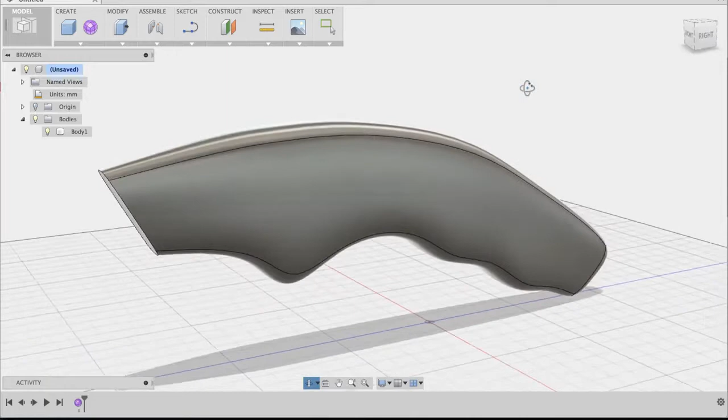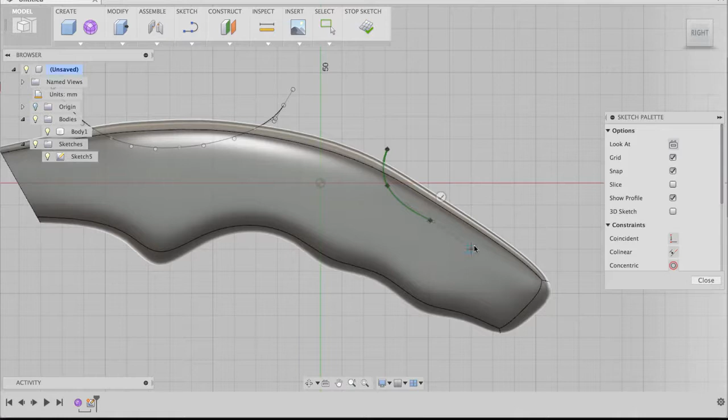First thing we're going to do is use the spline command under the sketch dropdown, and we're going to sketch out the profile of the inserts. We want an insert at the very top here, so I'll sketch out the spline. We also want an insert at the bottom near the handle, so we'll sketch out this spline here. Then we click Stop Sketch to finish.

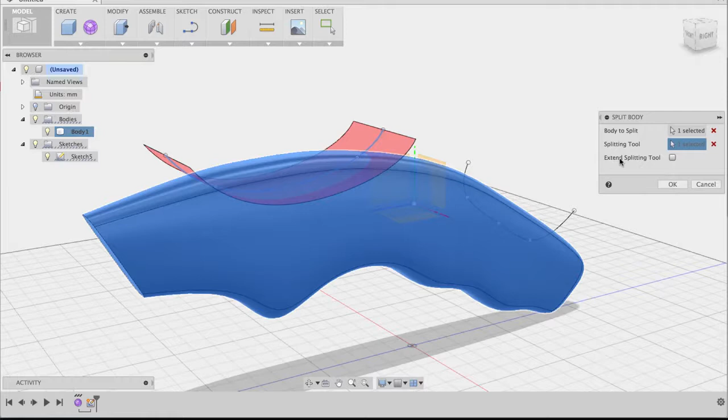Now we have two sketch lines, and we're going to use the split body command to split the body into three different pieces. The body to split is the utility knife body, and the first splitting tool is the first sketch. We'll uncheck the extend splitting tool since we don't need to extend it, and click OK. Now you can see we have two separate bodies in our bodies folder: the first body we split, and the utility knife body.

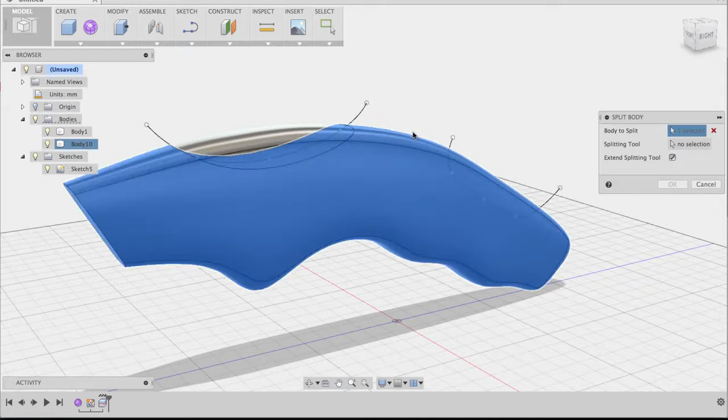Now we're going to repeat this split body command, turning on the sketch so we can see our second sketch line, and do the same thing. The body to split is the knife body, the splitting tool is that second sketch line, and we say OK. Now we have three bodies.

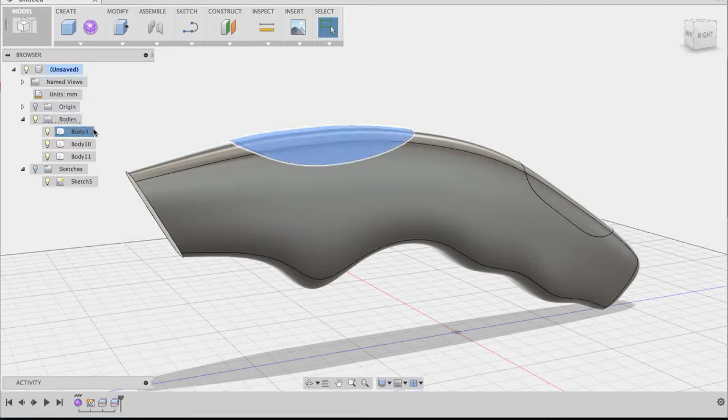Let's hide the sketches so we don't have to see them anymore. Now we're going to copy and paste the two separate bodies we just created—body 1 and body 10 for me, maybe different numbers for you—just make sure those two new pieces are selected. We right click in the browser, say copy, and paste it, duplicating these two bodies so we have two sets of them. We're not going to move them, just say OK.

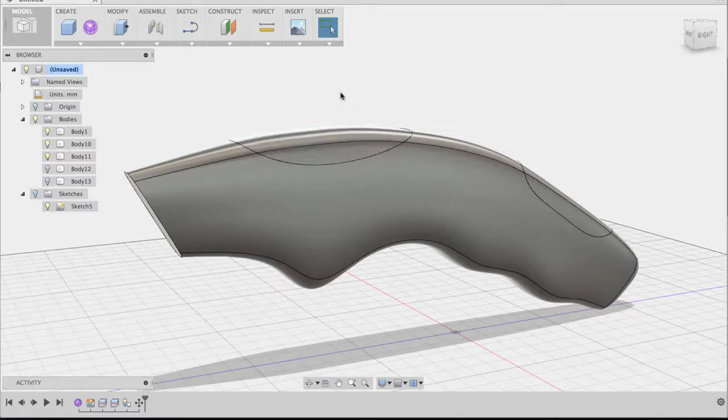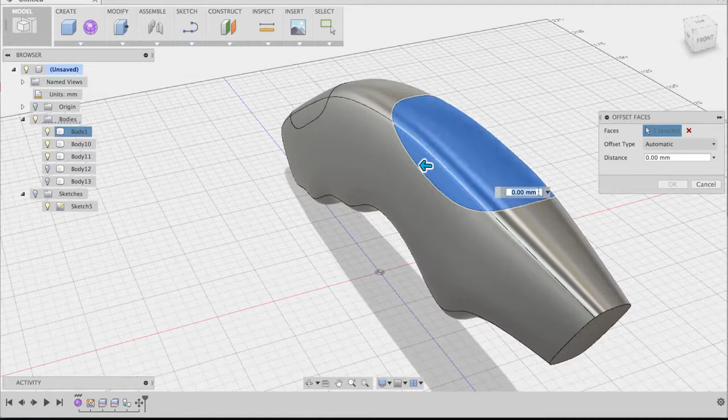Now we're going to hide the two new pieces and work with the two original ones. The way to get the offset of these inserts is to right click, press pull, and once press pull is activated, select the surfaces of the inserts. We give this a value of -2 and say OK, and now they're offset.

So I'm going to do the same thing to the back: right click, press pull, select the surfaces you want to offset, give this a value of -2, and say OK.

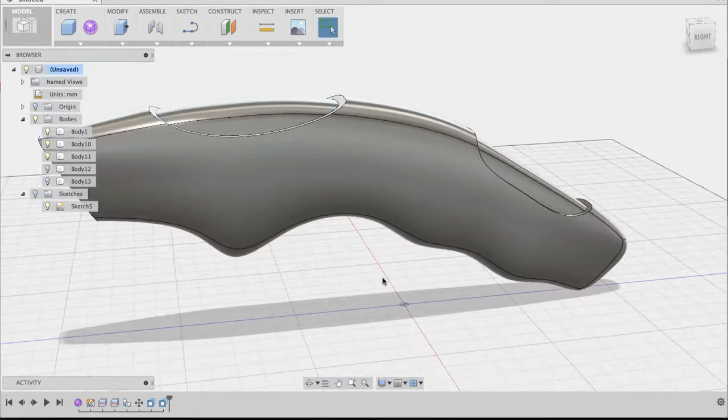Now that these pieces are offset, we're going to combine all three pieces to the knife body. So we go to Modify and click Combine. The target body is the knife body, the tool bodies are the ones we've just offset, and the operation is a join. We can leave the two options, new component and keep tools, unchecked, and say OK.

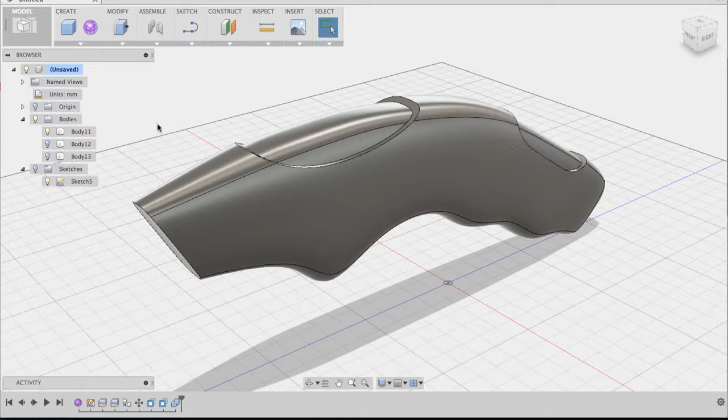Now in your body folder, you should see three bodies: the newly combined body with the knife body, and the two bodies you've hidden previously. Now we're going to unhide them so we can see those two inserts we made a while ago.

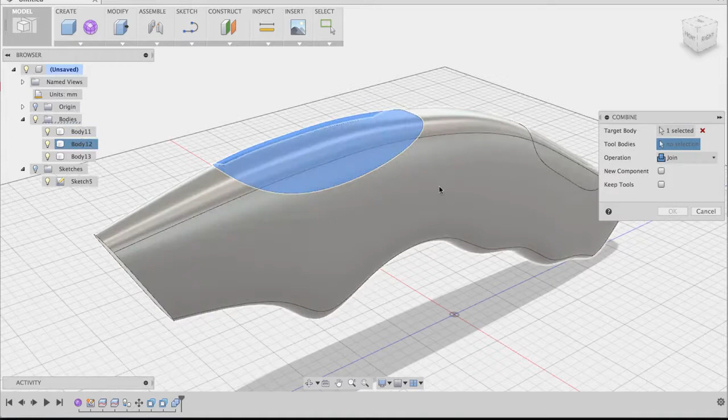This time we're going to do a combine cut. We go again to the combine command. The target body this time is one of these inserts, the tool body is the knife body, the operation now is a cut, and we want to keep the tool. Let's click OK, and now let's repeat the same thing for the bottom side near the handle.

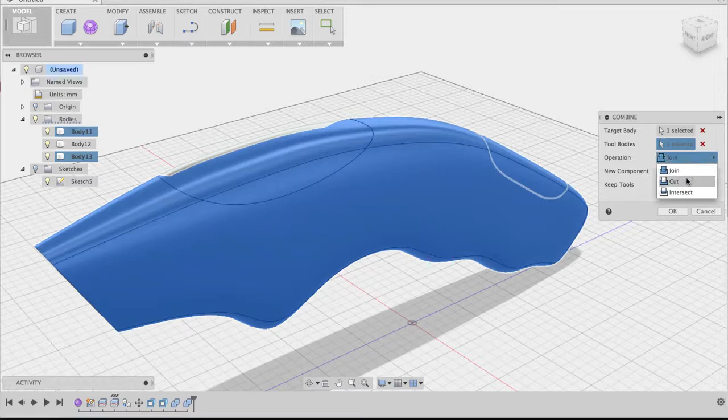Target body is going to be this new insert, tool body is the knife, it's going to be a cut, keep tool, say OK. Now if you hide the knife body, you can see that we've made the inserts because we've cut the positive side to the negative.

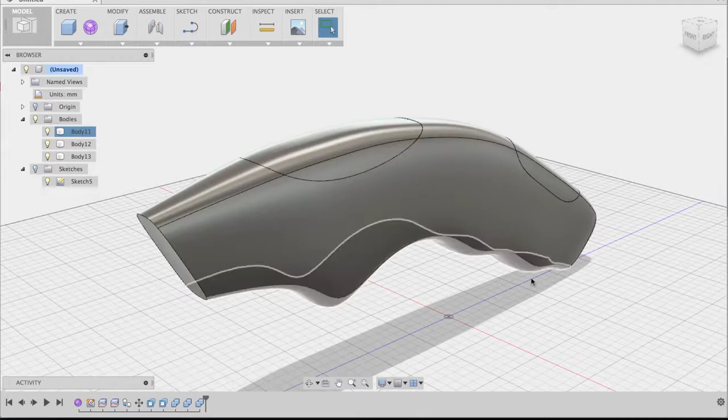And now you basically have inserts for your knife. You can also fillet the edges to make it look better, and apply different materials so they have a rubber grip as opposed to the knife material. Basically that's how you would do it.